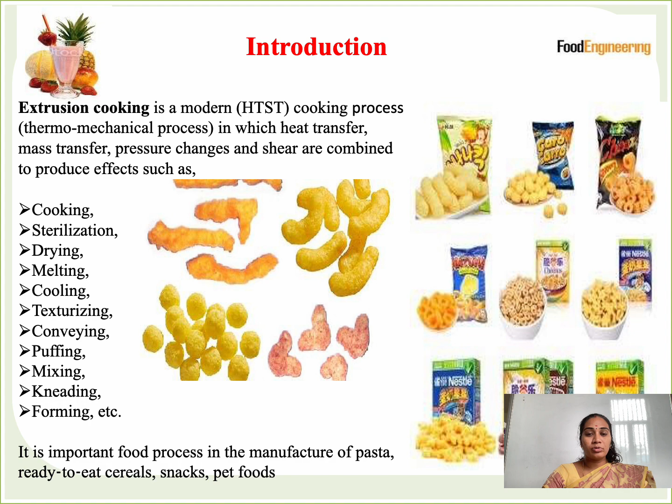So extrusion cooking is used to produce pasta, ready-to-eat cereals, snack foods and pet foods. It is a high temperature short time process. Extrusion cooking brings about the gelatinization of starch, denaturation of proteins, modification of lipids, inactivation of enzymes, and it also reduces many anti-nutritional factors and microbial contamination.

It can be done in two types: hot and cold extruded foods, where the water activity of the product will be around 0.1 to 0.4, and the materials are packed and used for distribution.

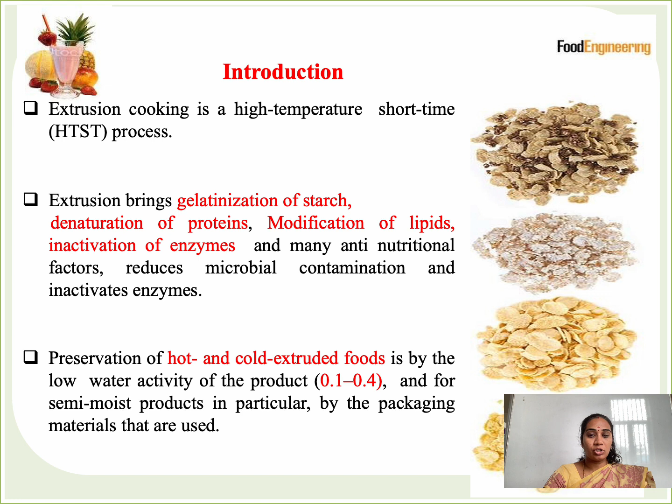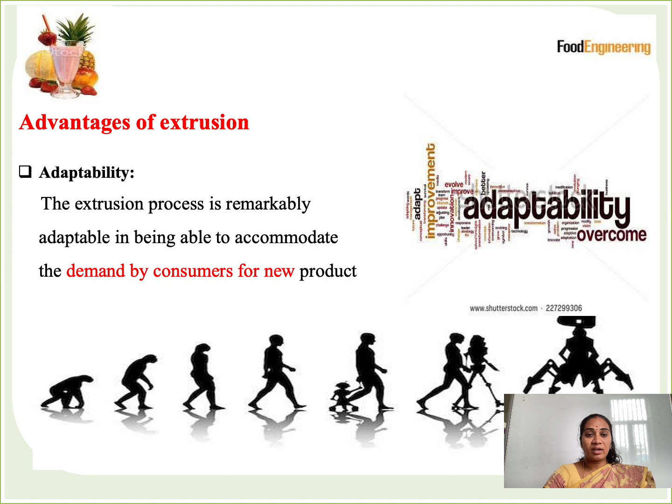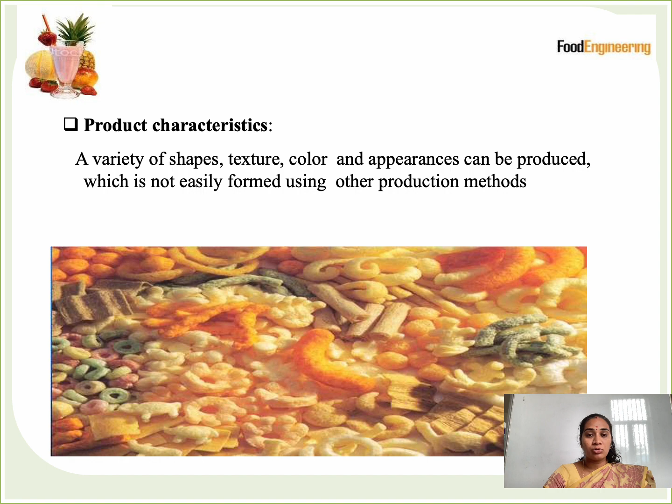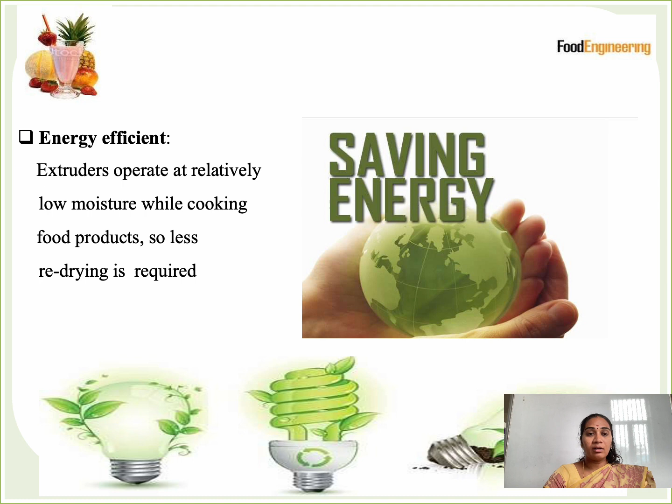Coming to the advantages of extrusion, the first one is adaptability. It is easily adaptable by consumers, so consumer demand for new products has increased. Also product characteristics: a variety of shapes, textures, colors and appearances can be produced with the same raw material, so consumer preference is higher. And it is energy efficient: it operates at relatively low moisture while cooking food products very quickly, and less re-drying is required, so it saves energy.

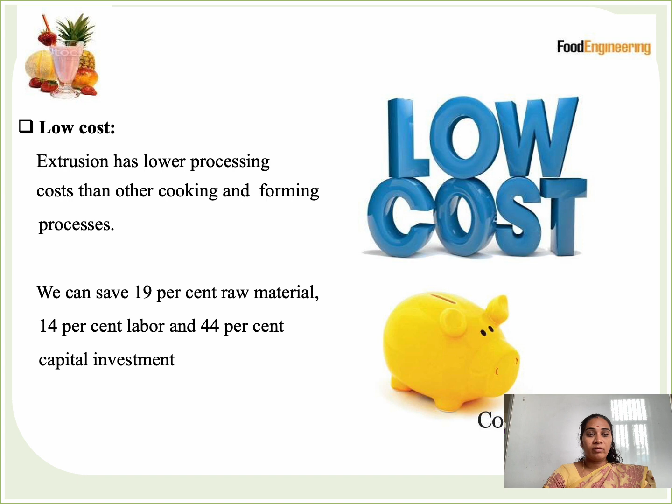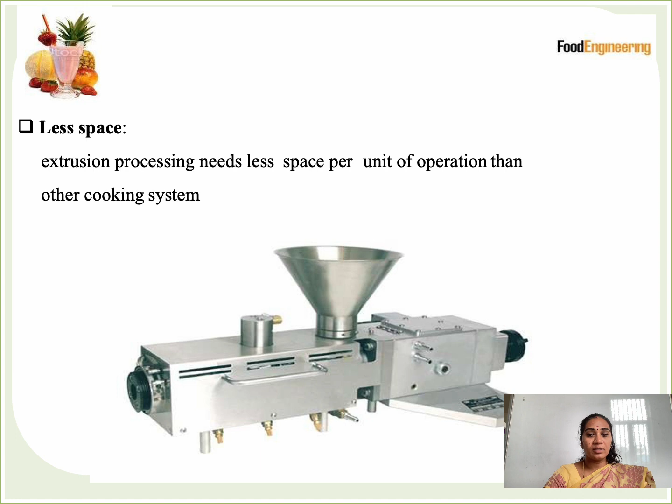Low cost: the cost of producing the extruded product is very low compared to other processes. Less space: only a single machine is required to produce extruded products. All the unit operations are performed in a single machine, so less space is sufficient to produce the product.

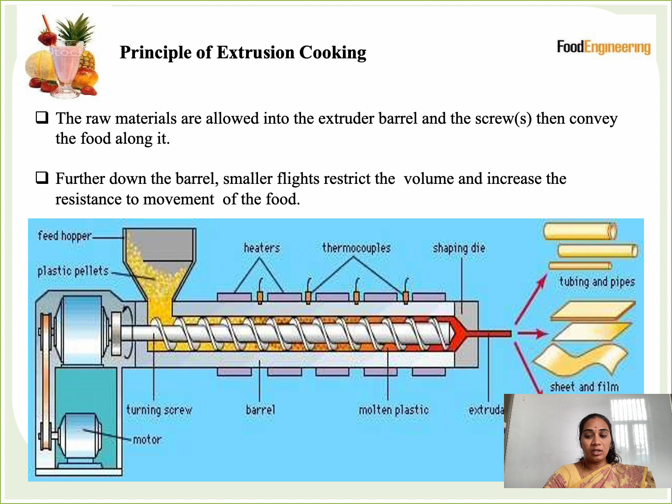The raw materials are passed into the extruder barrel and conveyed, and in the barrel you can see the screw diameter increasing from one end to the other. At the feed end the diameter will be less, and at the product end it will be wider. This is to increase the compression and shearing action between the materials.

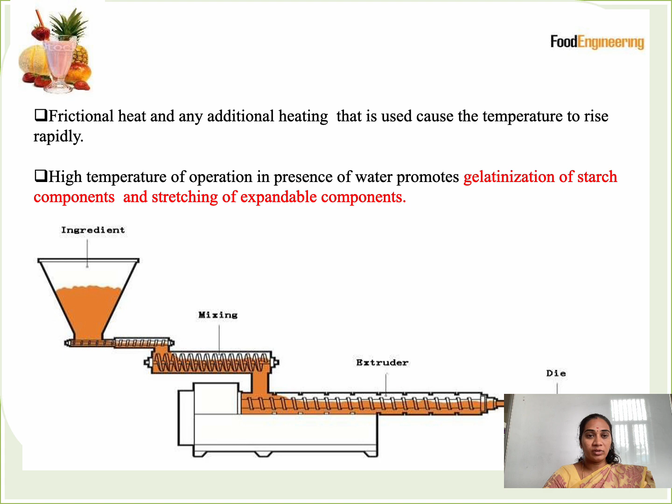Here the semi-solid material enters and is heated to above 100 degrees Celsius, and cooking takes place. Here gelatinization, denaturation of protein, stretching of the components, everything takes place. Frictional heat is produced due to the mixing and rubbing of the materials. In addition to that, heat is supplied using the external heaters.

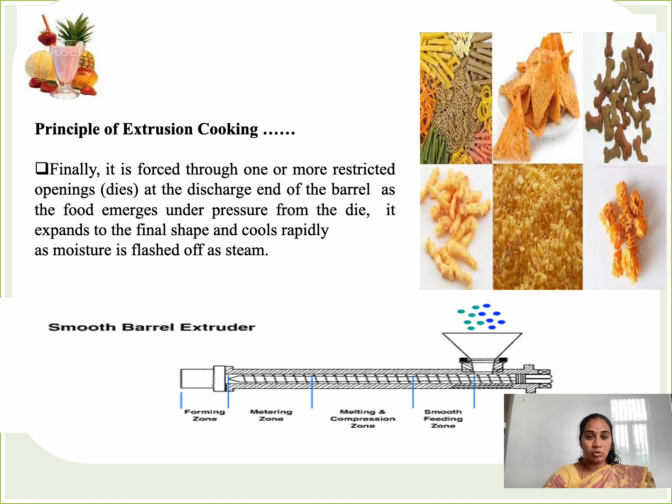Here the material is forced through the die and comes to the final shape. Once it reaches the final shape, it is rapidly cooled, and the moisture flashes off as steam, giving the product its puffy nature. In the extruder we have three zones: the feeding zone, the melting and compression zone, and the metering and forming zone. In the forming zone, we get the desired shape of the product.

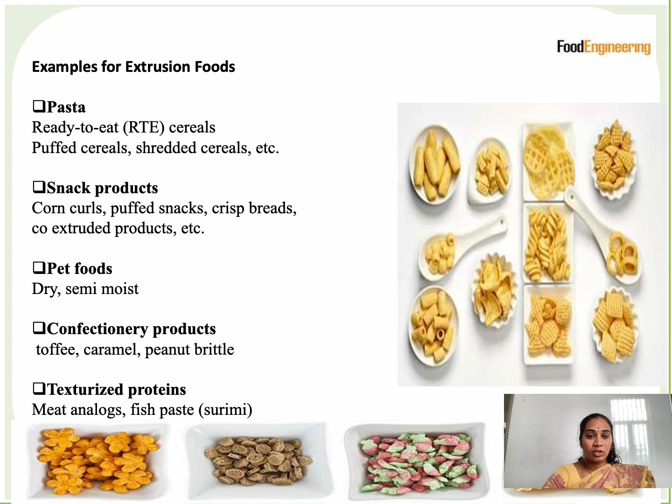Examples of extruded foods are pasta, snack products, pet foods, confectionery products and texturized proteins. Coming to the classification of extruders, based on operation they are hot extruders and cold extruders. In hot extruders the temperature is above 100 degrees Celsius, and in cold extruders it is less than 100 degrees Celsius. Based on construction, there are single screw and twin screw extruders.

In a single screw extruder, only one screw is present inside the barrel, whereas in a twin screw extruder, two screws are present inside the barrel. Twin screw extruders are further classified as counter-rotating and co-rotating. Counter-rotating means both screws rotate in opposite directions. Co-rotating means both screws rotate in the same direction.

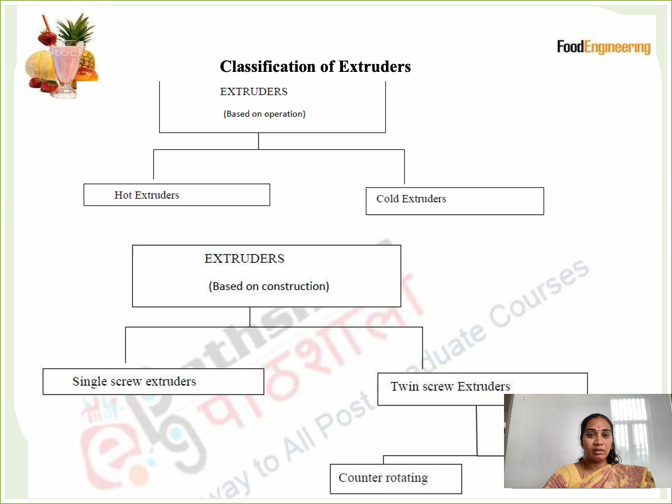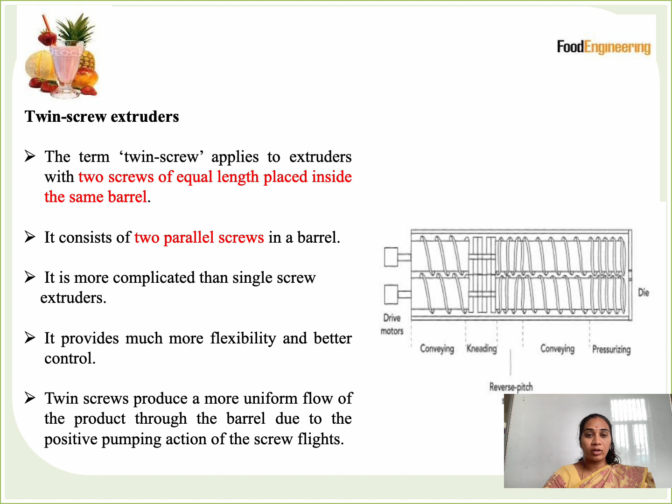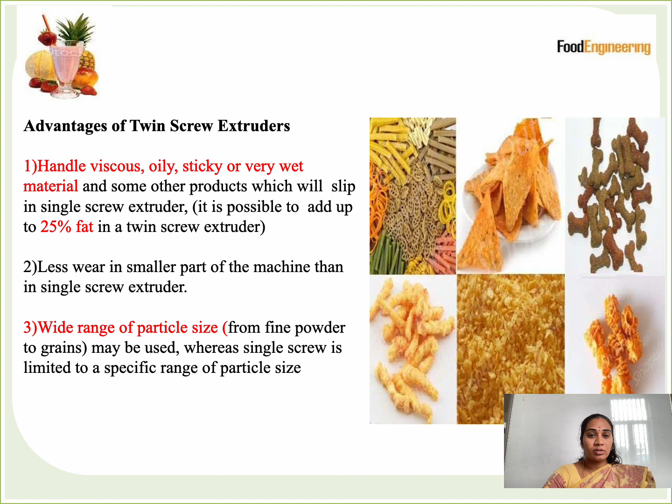The advantages of a twin screw extruder: it can handle viscous, oily, sticky or very wet materials, we can add fat up to 25%, less wear is seen in the machine, and it can be used for a wide range of particles. So this is a brief view of extrusion technology.